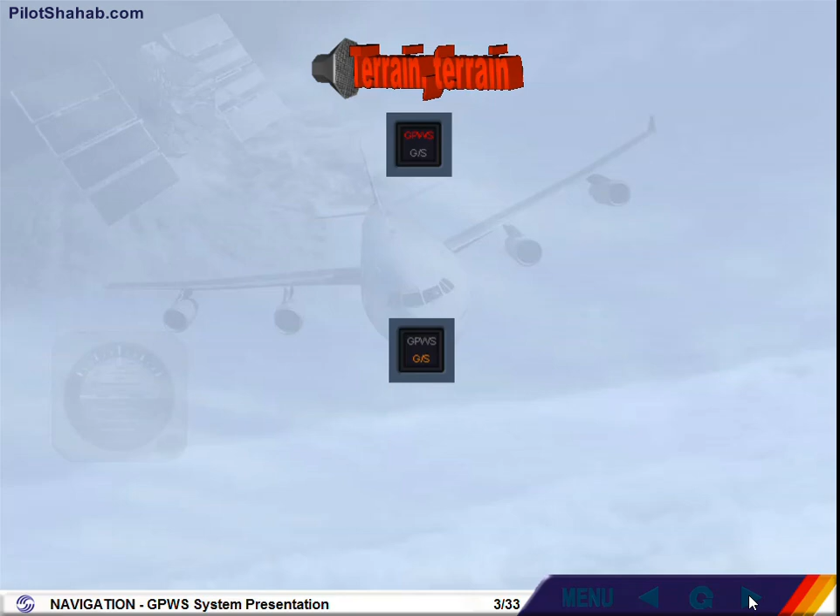The A340 family is equipped with a Ground Proximity Warning System, GPWS. Its purpose is to enhance safety by alerting the crew to potentially hazardous situations involving terrain collision or incorrect landing configuration. The GPWS monitors the aircraft flight path and generates visual and audio warnings alerts when the aircraft is in one of the defined hazardous situations. These warnings will be overridden by stall or wind shear warnings.

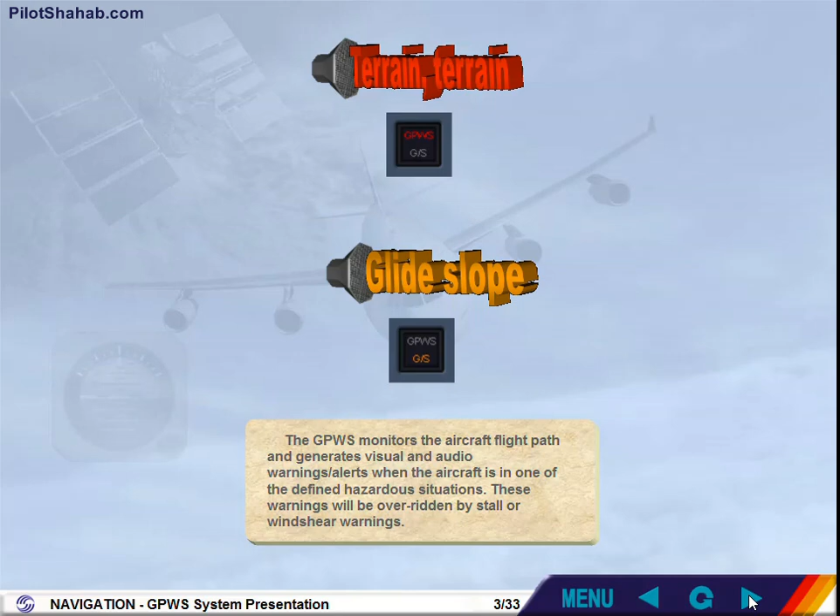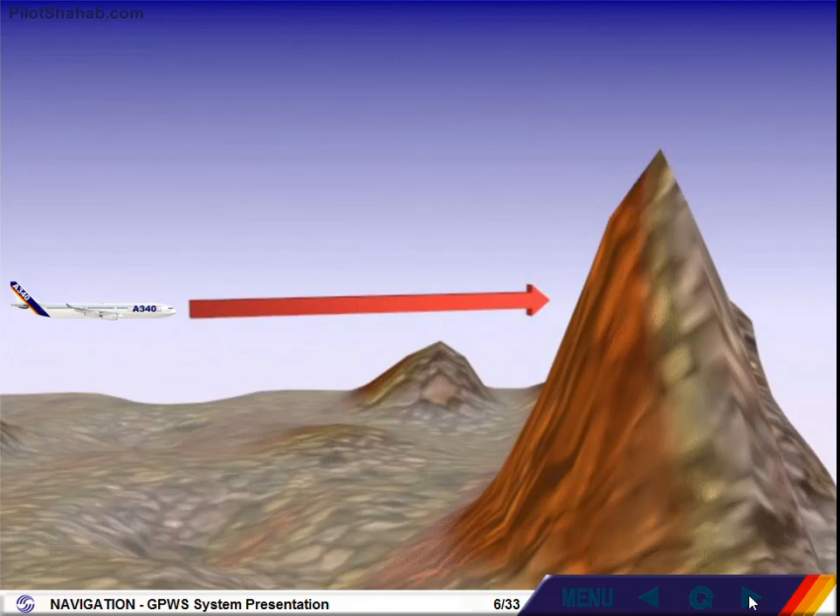The GPWS processes the data from RA1, ADIRS 1, ILS 1, FMGEC 1, LGCIU 1. Failures of these units will be studied in the abnormal operation modules. Most GPWS alerts and warnings are generated as a result of changes in radar altimeter heights or the rates of those changes. The system predicts potential hazards from these trends, but has no forward-looking capability. Therefore, impact with a near vertical cliff face cannot be predicted. GPWS does not absolve the crew from monitoring aircraft position and safety altitude.

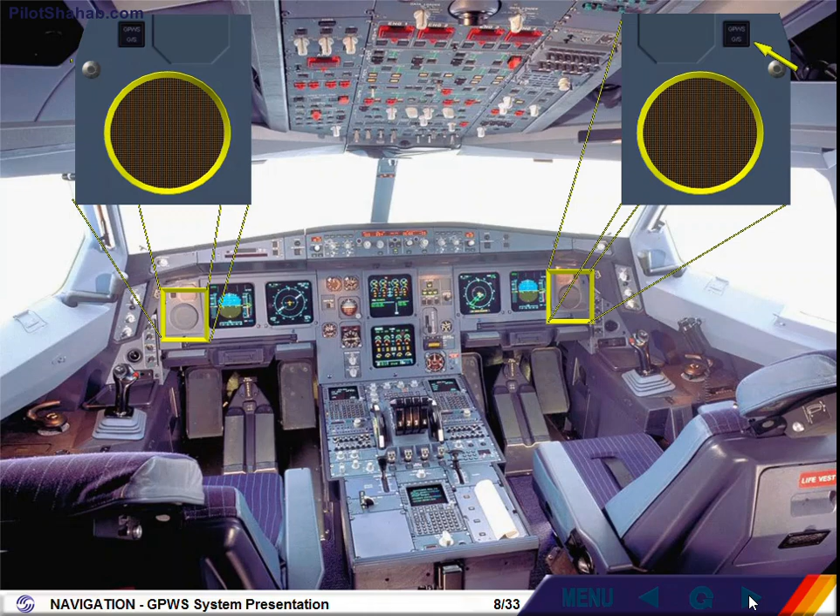The GPWS control panel is located on the left side of the overhead panel. GPWS visual warnings are provided on the miscellaneous panels. The system can be tested by pressing either GPWS glide slope push button switch. This test is normally performed by the maintenance crew. In addition, two loudspeakers located on each lower side of the main panel broadcast GPWS aural warnings even if they are turned off.

GPWS enhances safety by alerting or warning the crew of potentially hazardous situations during flight at low heights. Crews should react to any GPWS warning immediately without attempting to assess its validity. GPWS operation is fully automatic in the normal lights out configuration. We will now study the aural and visual alerts and warnings.

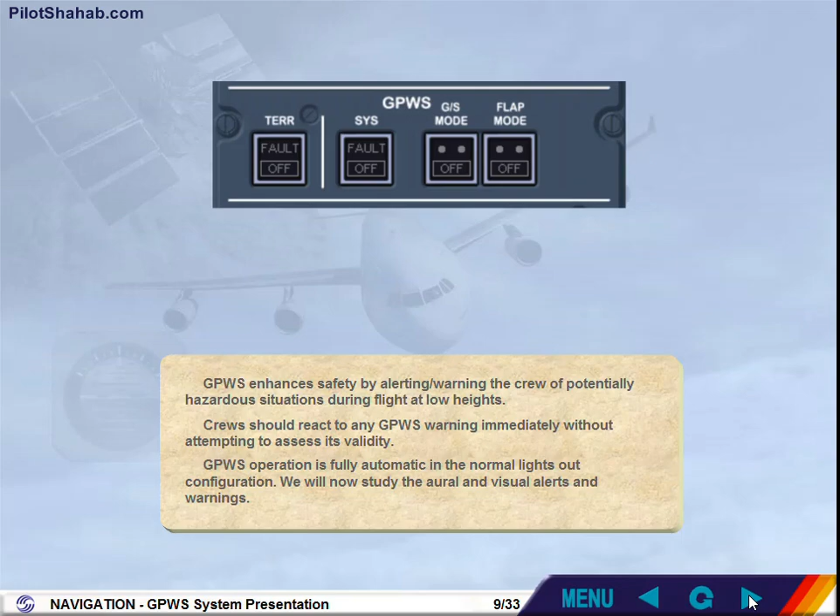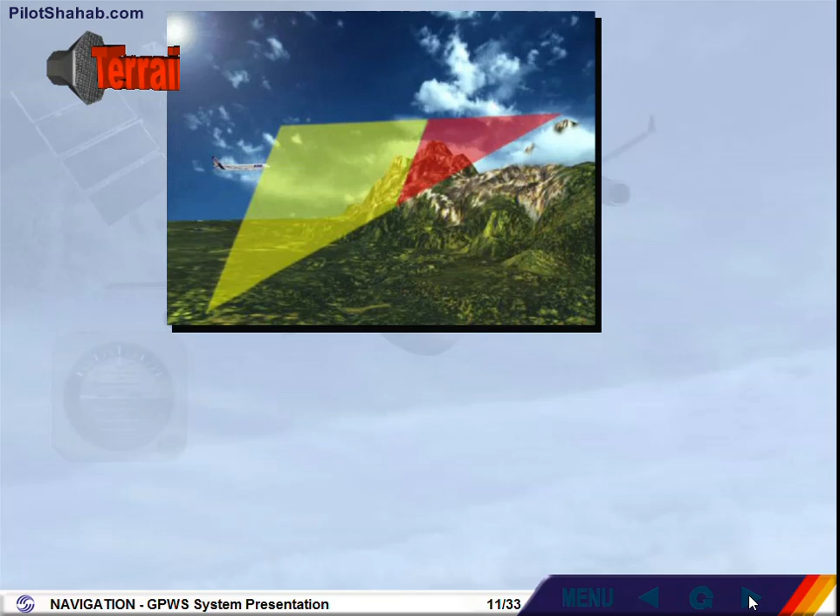If a high rate of descent is detected at low level, the GPWS will generate an aural, repeated sink rate alert. If this rate is or becomes excessive, the repetitive aural warning pull up will be generated. In both cases, the red GPWS lights will illuminate. If rising ground is detected as a potential threat to the safety of the aircraft, the GPWS will alert the crew with a repeated terrain aural alert. The system will generate a pull up warning after the terrain alert has been repeated twice. The red GPWS lights will illuminate in either case.

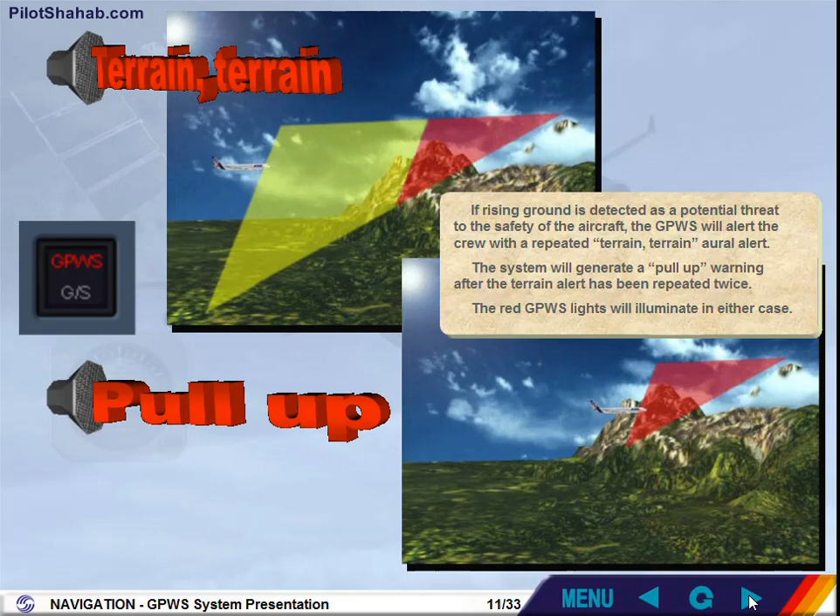If the GPWS detects a rate of descent during the initial climb after takeoff or following a go-around, it will give a repeated don't sink alert with accompanying GPWS red lights. If the landing gear and flaps are retracted and the GPWS detects that the aircraft is close to the ground, it generates a too low terrain aural warning, and the GPWS red lights illuminate. At very low levels, the aural warning too low gear will be generated if the landing gear is still retracted. If the landing gear is down, but the flaps are not in landing configuration, the warning is too low flap. Note that the too low gear warning has priority over the too low flap.

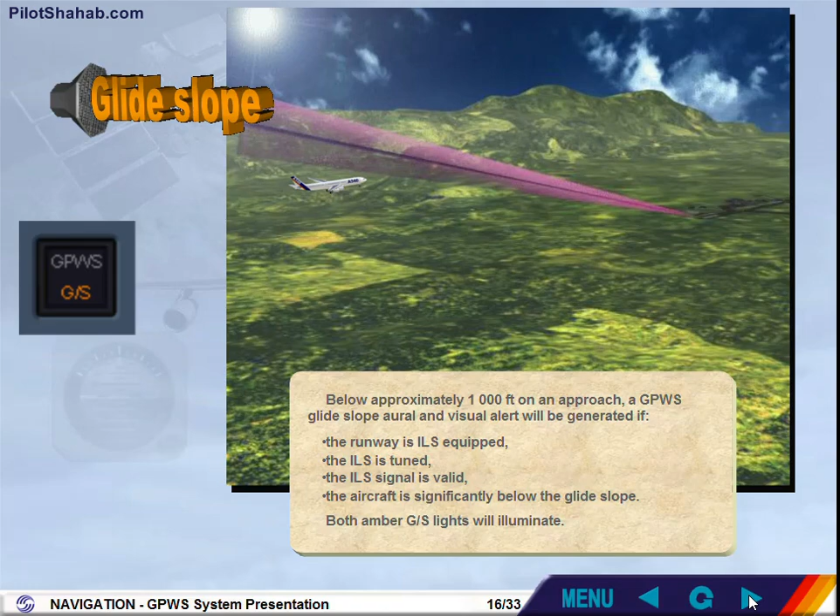Glide slope below approximately 1,000 feet on an approach. A GPWS glide slope aural and visual alert will be generated if the runway is ILS equipped, the ILS is tuned, the ILS signal is valid, and the aircraft is significantly below the glide slope. Both amber glide slope lights will illuminate. Glide slope. The aural message will become louder to indicate a warning if no corrective action is taken as the aircraft gets closer to the ground, or if it descends further below the glide slope.

Note that some airports around the world have approaches and departures which are not compatible with standard GPWS operation. These airports are programmed into the GPWS database, and the warning thresholds are modified to avoid nuisance warnings. The GPWS panel allows the crew to inhibit some warnings. Flap 3 is a recognized landing configuration. If the option is used or if required by an ECAM procedure, the crew should select Landing Configuration 3 on the MCDU to ensure that the GPWS does not generate warnings when it detects that the aircraft is not in the full flap configuration.

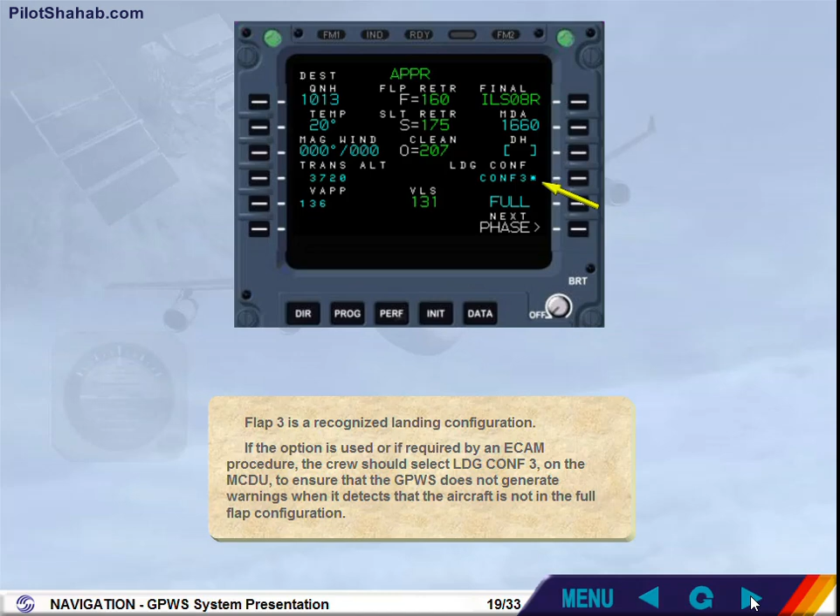Following certain failures, a landing may have to be made with a reduced flap setting. The crew can select the Flap Mode push-button switch off to inhibit GPWS flap warnings. If the flap mode is off, the green Flap Mode Off message is displayed on the engine and warning display.

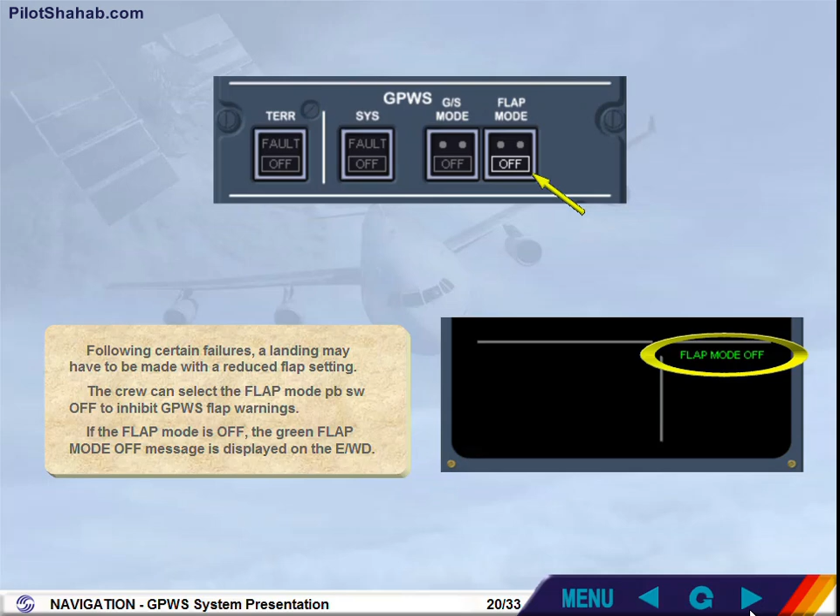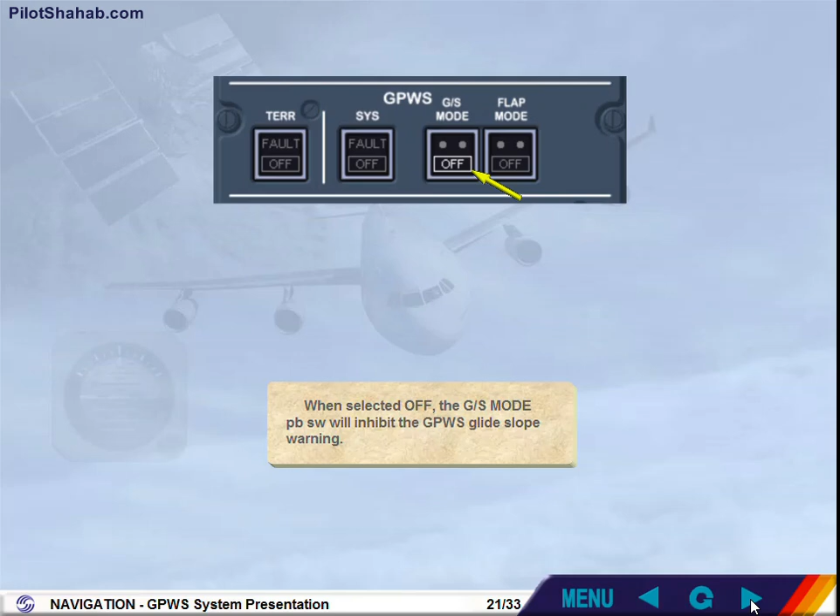When selected off, the Glide Slope Mode push-button switch will inhibit the GPWS glide slope warning. The white off light illuminates when the GPWS is selected off. All warnings are inhibited.

If your aircraft is equipped with the enhanced GPWS, eGPWS, a forward-looking capability for terrain is added. The basic functions we have just studied remain unchanged. eGPWS is based on terrain databases and FMGEC current position, not on radar returns. The purpose of the eGPWS is to avoid a controlled flight into terrain and to give enough time to the crew to perform an avoidance maneuver.

The terrain information is displayed on the ND except in plan mode. A different image texture, an image display which sweeps from center outward to both ND sides, and a terrain indication instead of the radar tilt indication help the crew to distinguish between the eGPWS terrain computed data and the ground picture sensed by the radar. The terrain elevation surrounding the aircraft is color-coded.

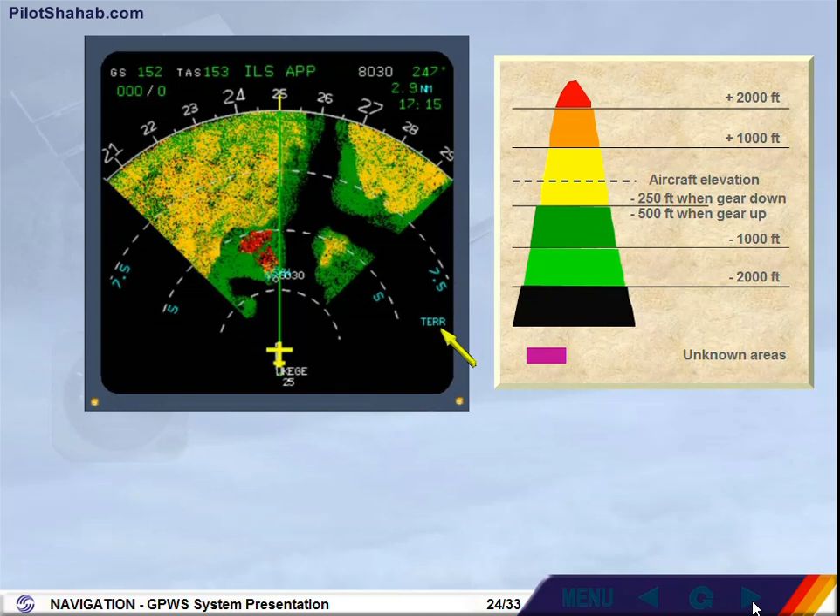Two Terrain On ND push-button switches are fitted on each side of the main panel. To display the terrain picture on his ND, a pilot will have to switch on his respective Terrain On ND push-button switch. Note that the weather radar information is replaced even if it is switched on.

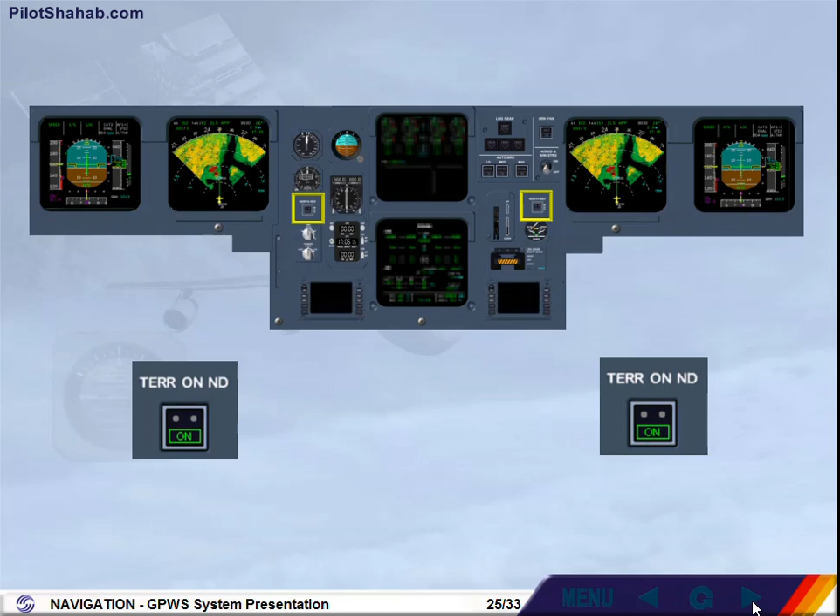In the lights out position, the eGPWS operation is fully automatic. The terrain push-button switch in the off position allows the crew to inhibit the enhanced functions, but keeps the basic GPWS functions operative. In case of failure of the enhanced functions, the fault light comes on, but the basic GPWS functions remain operative. As for the basic GPWS, the system push-button switch controls the basic functions.

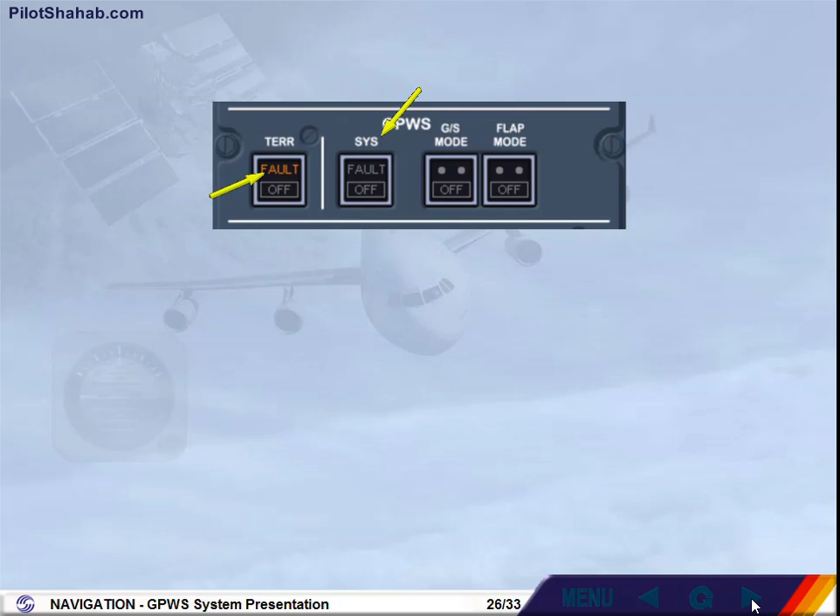The eGPWS uses a terrain database coupled with an FMGEC position to calculate two terrain envelopes ahead of the aircraft. When a conflict is detected between these terrain envelopes and the terrain memorized in the database, an alert is triggered. One terrain envelope corresponds to a caution level, while the second one to a warning level.

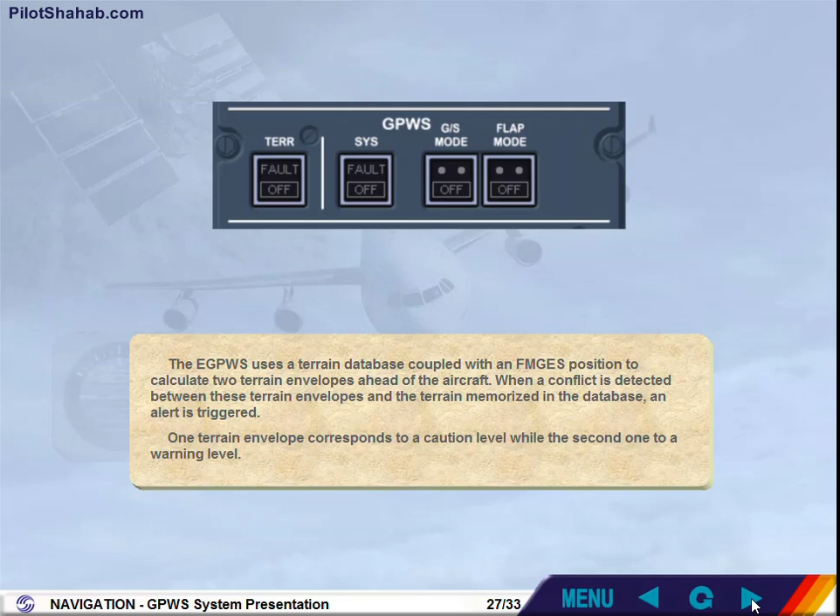If the caution terrain envelope is penetrated, the areas which violate the caution envelope limits turn to a solid yellow color. An amber terrain ahead message appears and a repeated Terrain ahead aural alert is generated. If the terrain warning envelope is penetrated, the areas which violate the warning envelope turn to a solid red color. A red terrain ahead message appears and a repeated Terrain ahead Pull up aural alert is generated. In both cases, the red GPWS lights will illuminate.

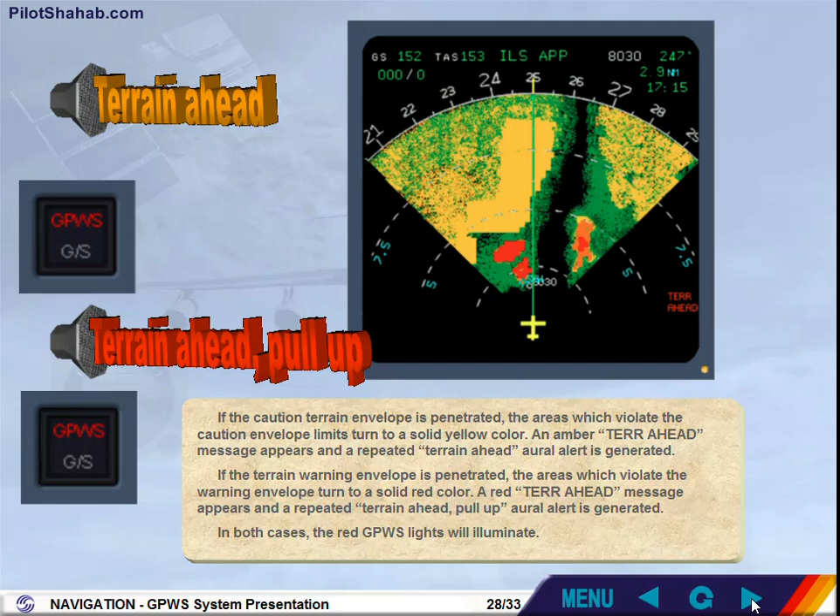As for the basic GPWS warnings, crews should react immediately without attempting to assess its validity. In case of caution or warning, if terrain on ND is not selected on, the terrain display is set automatically to on and the on light on the terrain on ND push-button switch comes on.

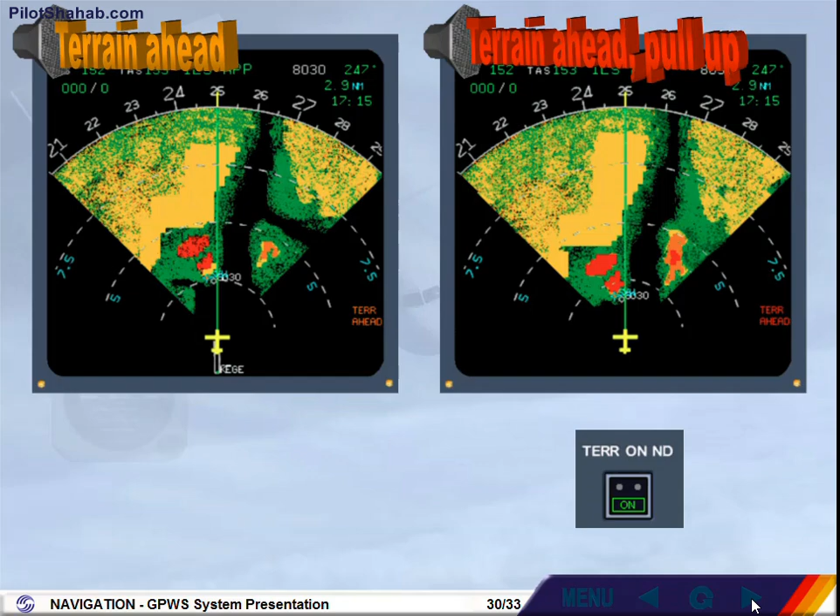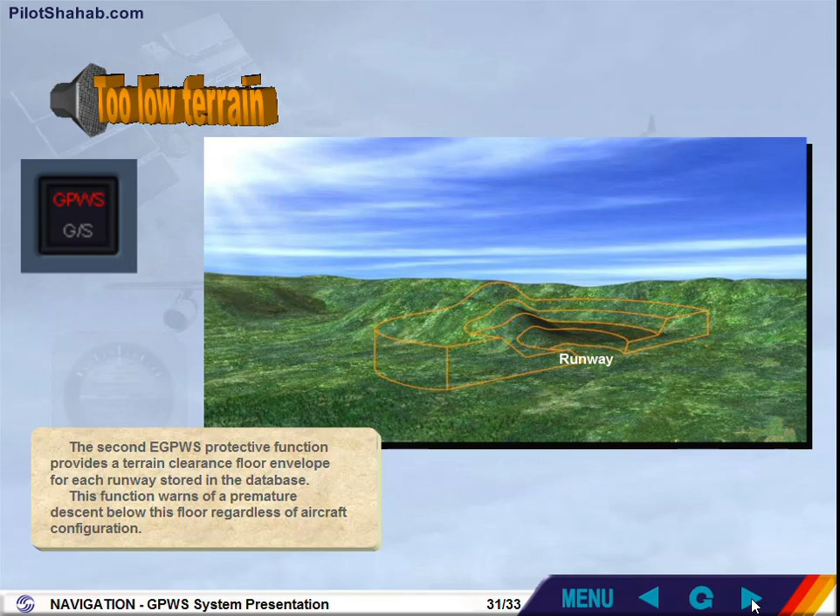The second eGPWS protective function provides a terrain clearance floor envelope for each runway stored in the database. This function warns of a premature descent below this floor regardless of aircraft configuration. Caution: the relative height is calculated using the Captain baro setting. Thus, the system does not protect against baro setting errors. The position is calculated using FM1. The system does not protect against FM1 position errors.

When the aircraft position accuracy provided by the FMGES is not sufficient, the enhanced functions of the eGPWS are automatically deselected. Terrain standby appears in green on the ECAM memo and the terrain display is deselected until a high level of navigation accuracy is restored. The basic GPWS functions remain operative.